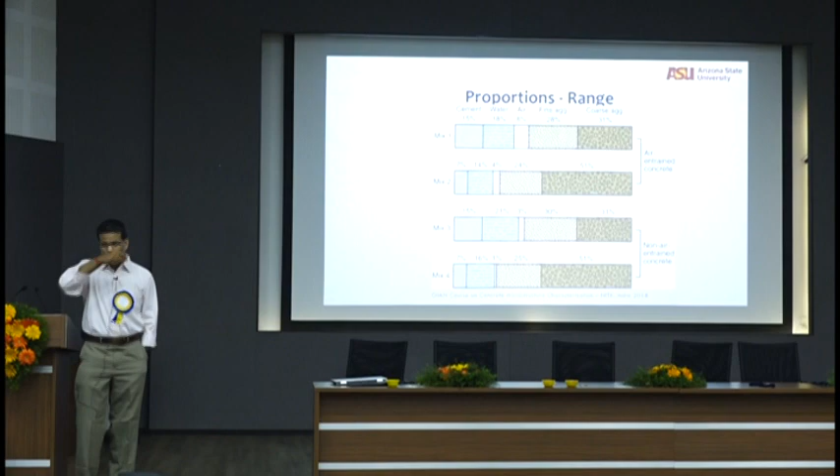Just some rough numbers of air entrained. I mean, this is the typical US. In the US, most concrete is air entrained. You will have some air in all the concrete because we have freezing and thawing in pretty much every part of the US, except for the Southwest. But still, air is there in every concrete because we need protection from freezing and thawing. You will have freezing and thawing issues if you go up in the Ladakh, Leh, Kashmir, Himachal Pradesh areas. You have the same thing there also.

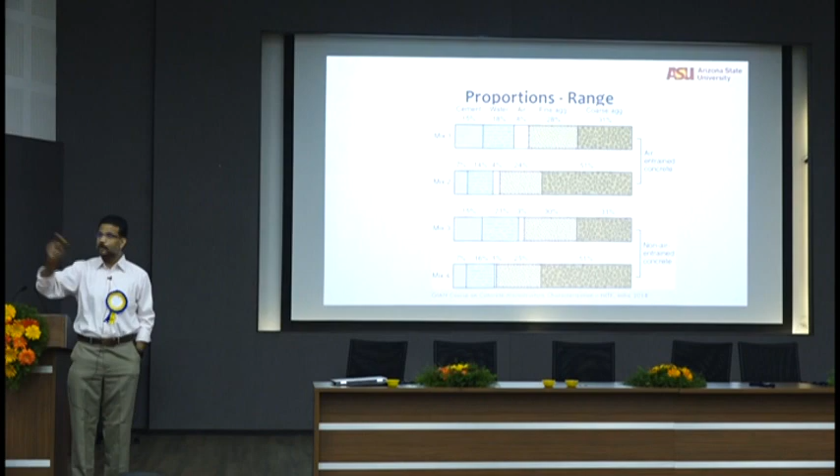So if you look at air entrained concrete or non-air entrained, you see roughly what volume percent is cement, what volume percent is coarse and fine aggregates. Here also you will see a little bit of air because even if you don't want to put in air, you will have some air. You see all these honeycombs and stuff in the concretes that are made. And then 30 to 50% of coarse aggregates, 25 to 30% of fine aggregates, 16 to 21% of water, 7 to 15% of cement, roughly by volume.

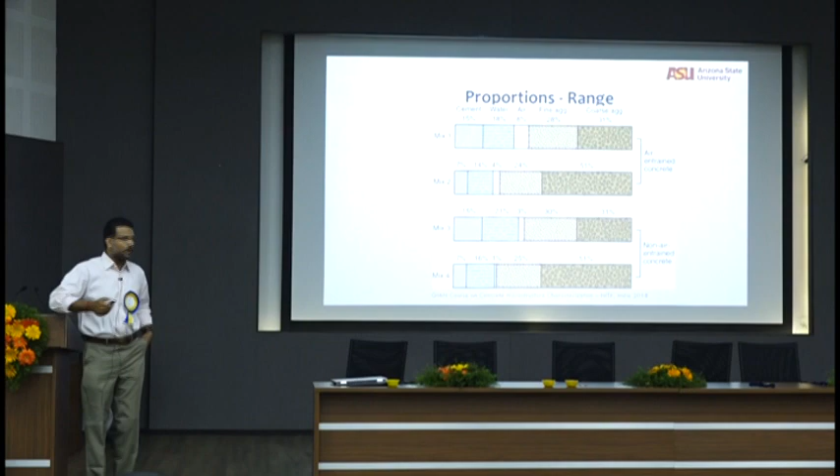Okay. Now, one of the important things is that if you do concrete mixture proportioning, you always do it by volume, right? Because nobody asks you for 10 kilograms of concrete. They'll ask you for 1 cubic meter of concrete. So if somebody asks you for 1 cubic meter of concrete, you have to design it for 1 cubic meter, not for the equivalent weight, because mass is not a good way to design anything.

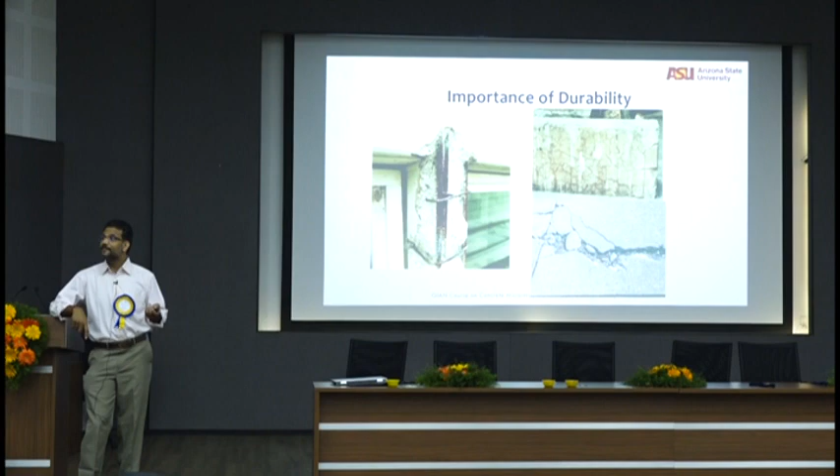Okay, so simple. Again, a food example is very easy to relate to. Normally, when a doctor says, if you have some disease and you have to control your food, they'll say 1 cup of rice, right? Volumes. But if you travel on airplanes now, they'll give you 100 grams of biscuit, 50 grams of cashews. Food was always in terms of volume. Now food is in terms of mass because they can charge you for mass easily. They can give you something of very high density and the volume would be very little. Okay, durability, we'll cover durability in one complete session on Friday, possibly, on what happens with damage and how microstructure relates to damage.

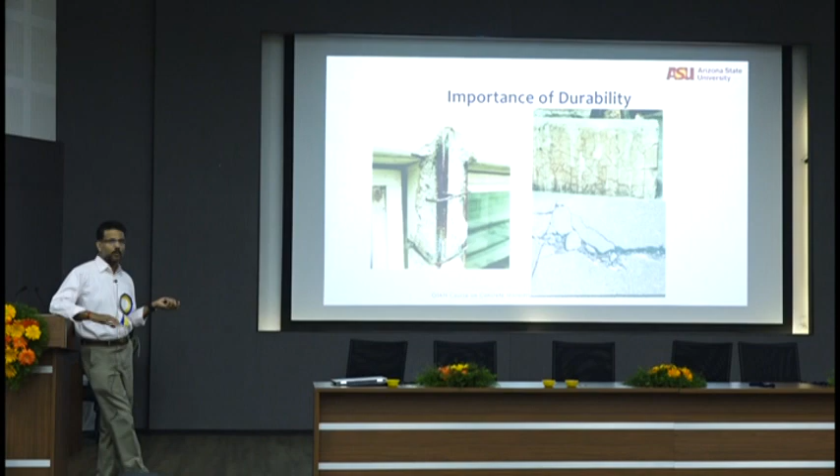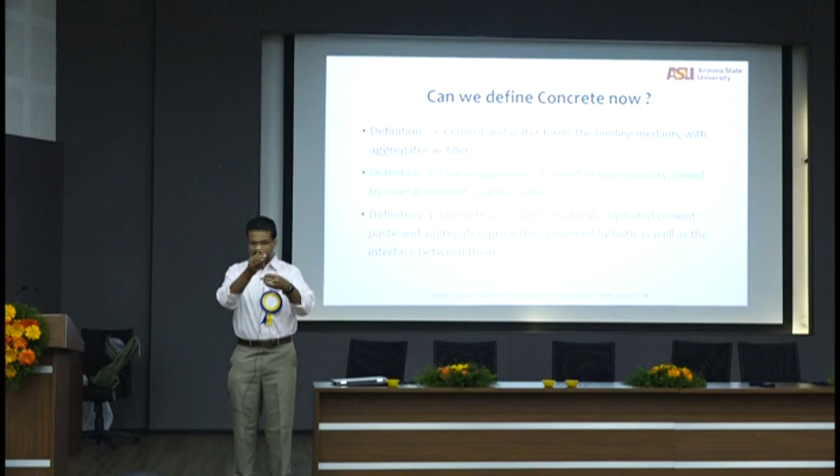Here is where I talk to you about the weak link theory, right? When you join something, what is a weak link? The interface between them. If you take sand and paste, and aggregate and paste, and take 1 cubic meter of concrete, how many interfaces? Billions and billions of interfaces, right? You have so many interfaces, you're not dealing with 1 or 2. So it is interface properties that control a lot of different things.

Now, how does concrete fail? Does concrete fail in compression? Is concrete weak in compression? No, it's weak in tension. Tension means what? Pulling. If you have an interface, what does pulling mean? Separating things. Very, very natural. Now, when we talk about mechanical properties, we'll deal with the idea that the idea of compressive strength is totally wrong. Okay? In real life, nothing should fail in compression.

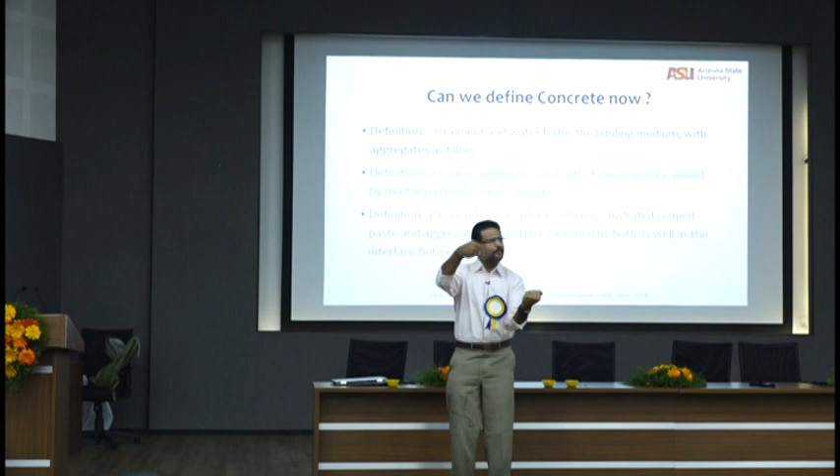Get the idea? If I push, a compression means two atoms coming close together. When I bring two different things close together, why should they fail? Should they fail? But why are we still failing? If I take a concrete cylinder and compress it, it's still failing. Why is it failing? Is it failing in compression?

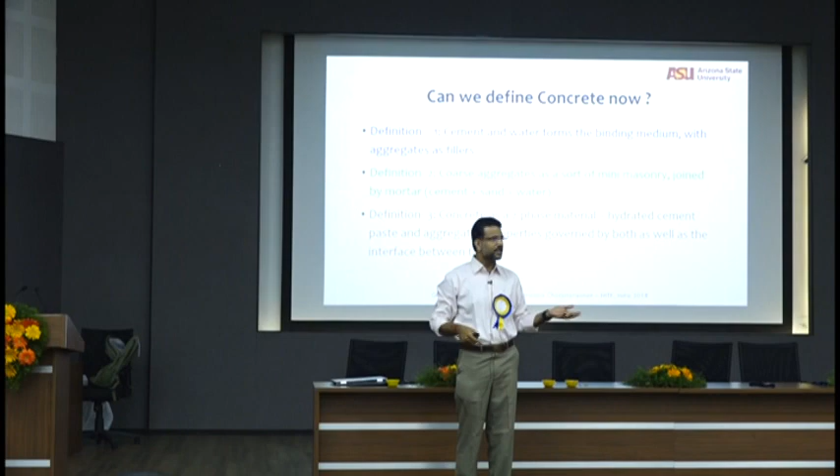Structural engineering question. Yeah, it's failing in tension. How is it failing in tension? Because of the wonderful thing called Poisson's ratio. When I have a longitudinal compression, I have a lateral expansion. Concrete expansion means what kind of stresses? Tensile stresses. It is that tensile stress that fails it, not the machine, the stress that the machine applies.

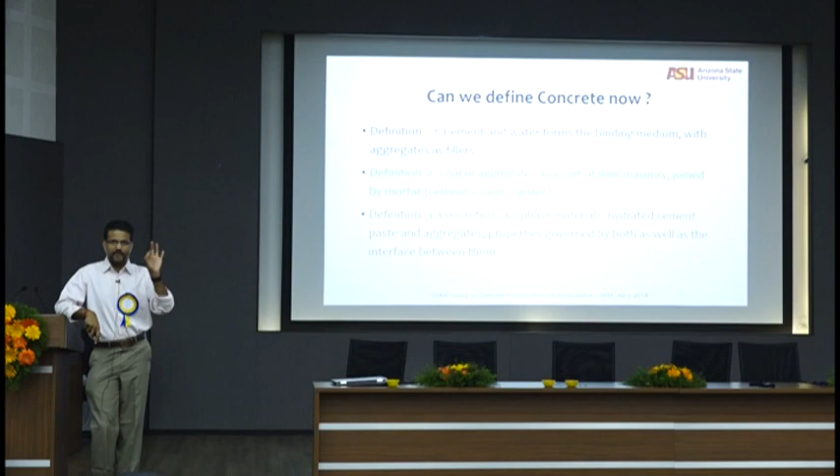But we don't want to change what is traditionally called compressive strength, so we still use a random number. Compressive strength of concrete is fundamentally, scientifically, a totally useless quantity. 40 megapascal concrete means nothing. 40 megapascal in compression means nothing. 100 megapascal in compression means nothing. It's just a convenience number because that one number masks my entire ignorance about concrete as a material.

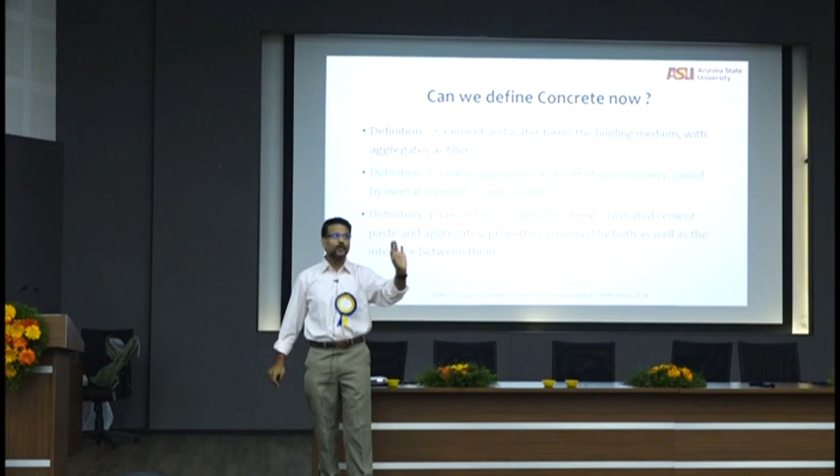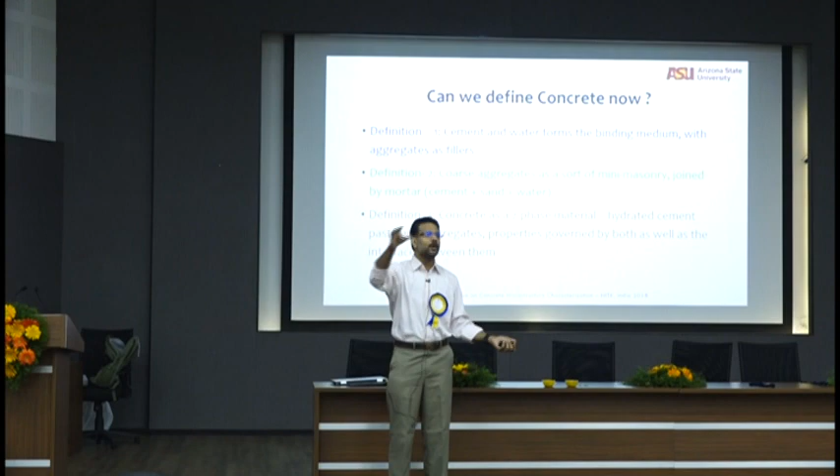I say 40 megapascal, I think I've conquered the world. I completely mask my ignorance about everything that has gone wrong in that concrete by showing a 40 megapascal strength. I can have a big gaping hole in that concrete and still get 40 megapascal strength, right? I can have all the dirt and all the unnecessary minerals in it, but if I dump 800 kilograms per cubic meter of cement, it will give me strength. But is that the concrete that you want?

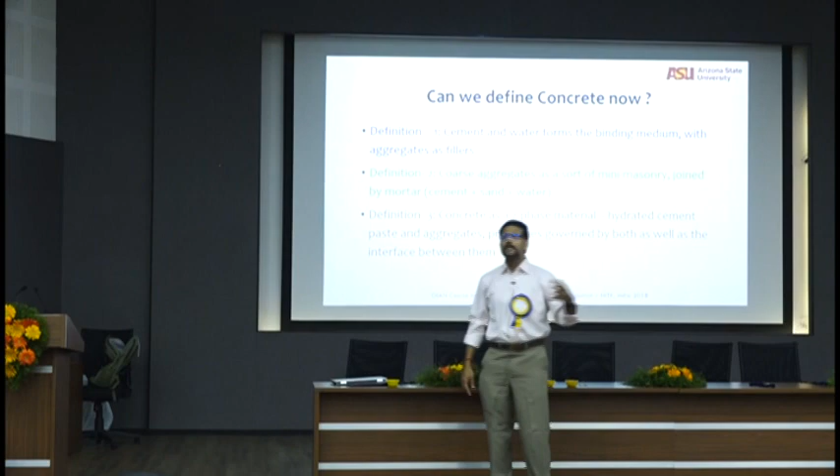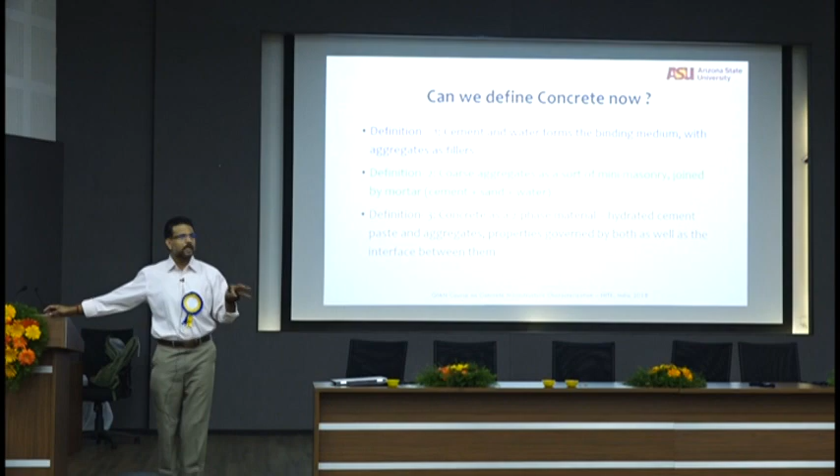The question: strength as an acceptance criterion, you and I can do nothing about it. This is entrenched deeply in the public psyche. We cannot do anything. He was talking about 43, 53 grade cements. In the US, there's absolutely no grade of cement. There's no 43, no 53, no 33. There's just Type 1 ordinary Portland cement. Buy it, you will get some strength. That's it, period. Maybe 43, maybe 50. Nobody's worried about the strength of the cement.

Because, very simple idea: if I know how to design concrete, I can design concrete from any strength cement. If I know how to proportion it, and we'll talk about that as we go through, if I know how to pack my particles really well... How many people can fit in this room? Equal to the number of chairs. But if you look at some private buses that are flying through, do they just fill in people with the number of seats? They pack in as many people as they can.

So I used to work in Bangalore a long time ago. The conductor will say, go in, and there will absolutely be no space inside, but he'll still say, keep going in, keep going in. That's particle packing. You see these buses? That's packing. If you really pack more and more particles, you will remove the porosity. When you remove the porosity, things get stronger, right? So it's about packing, not about the strength of cement.

Cement is the glue that holds all these things together. If you put in 800 kilograms per cubic meter of cement, you will have a thick layer of cement around an aggregate. And if you take a piece of concrete and see a really thick layer of cement paste around the aggregate, you will know what happens, right? So it's not the strength of cement that matters, but how much paste is formed and what forms in the paste.

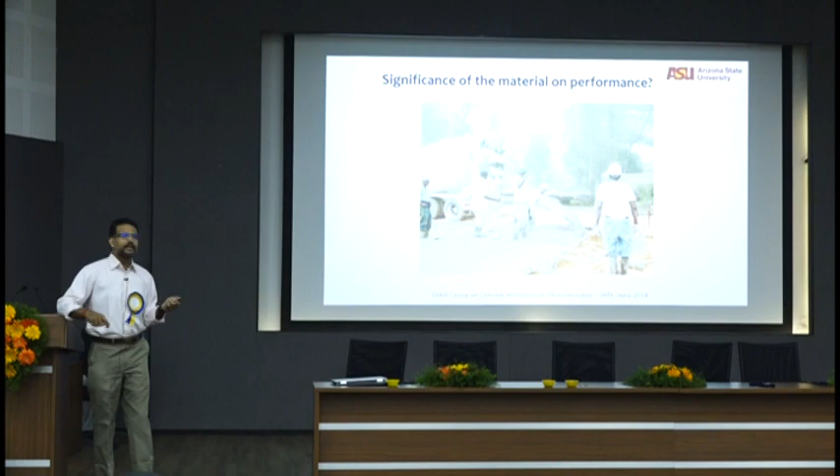Now, if you say all of these, when the concrete goes bad, what is that guy going to come and tell you? You asked for this. I gave you exactly what you asked for. Right? So we have been living in the prescriptive world for too long. It's changing now. In the US, a lot of it has changed. It's all called performance-based specifications. I'll tell the contractor, I want 40 megapascal strength. I don't care how you get it. Get that to me.

If it's a pavement, I would say I want 40 megapascal strength. I want the pavement to have an initial surface roughness of so much. I want the pavement to have a certain rapid chloride permeability value so that it doesn't get deteriorated fast. You will give 3 or 4 more performance indicators, not prescriptive indicators. So what that gives is, if it's a cement manufacturer or a ready-mix manufacturer, if he's really smart, and if he says, okay, I can give you the performance with 40% of fly ash instead of 35, won't he do it then? Right? If he does that, is that not better for all of us? That is the training that we should have. The training of giving people the knowledge and the freedom to design things, rather than what did you learn in your college? What did Professor Shetty's book tell you?

Please copy that and give that back. We don't need engineers for that. We have enough people who can just copy things from one place to the other, right? You go and sit in this document writer's office, in an advocate's office, they copy from one paper to the other, right? We have enough of those copies. We don't need them. Engineers need to be thinking and getting new things out into the market.

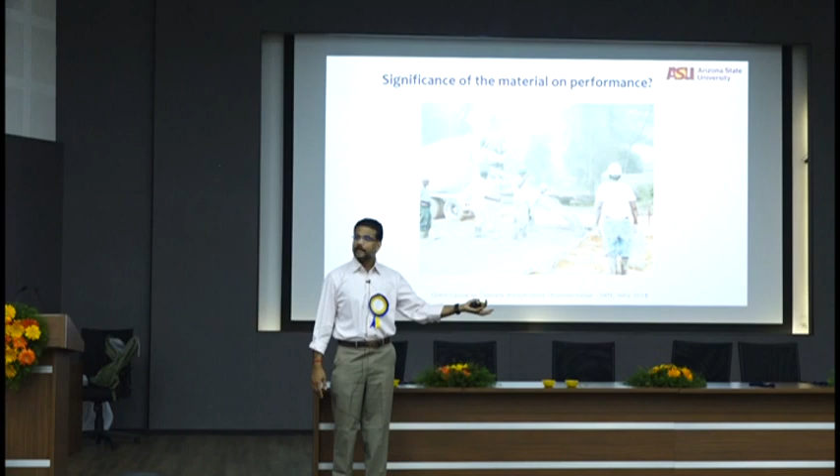So prescriptive specifications have to go to a certain extent. Now, why are prescriptive specifications not leaving us? Because the engineer or the owner doesn't have confidence in the contractor or the producer. So if producers are all established big companies, big ready-mix companies who know what they're doing, with good engineers on the board, and they come and tell a state PWD, okay, you want concrete, what do you want? You want this, right? I'll give you, don't worry, and I'll take the risk of something happening in it. When they do that, and when that establishes, things will change.

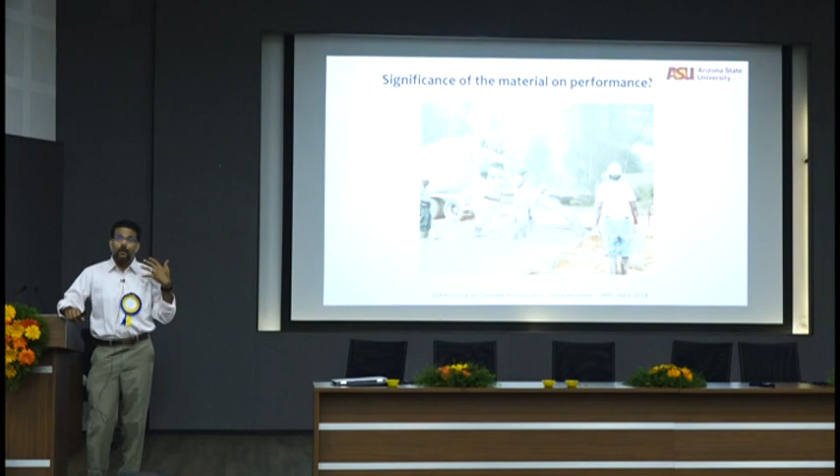But I think we should collectively argue for, and this is one of the things that is in the document that I sent to the Ministry of Surface Transport, which is in some dustbin now, moving more towards performance-based specifications. So if I say what I want effectively from my concrete is performance, however you do it, I want performance. So the question is, what are the effects of material properties on performance? That's something that we will look at in the next 3 or 4 days.

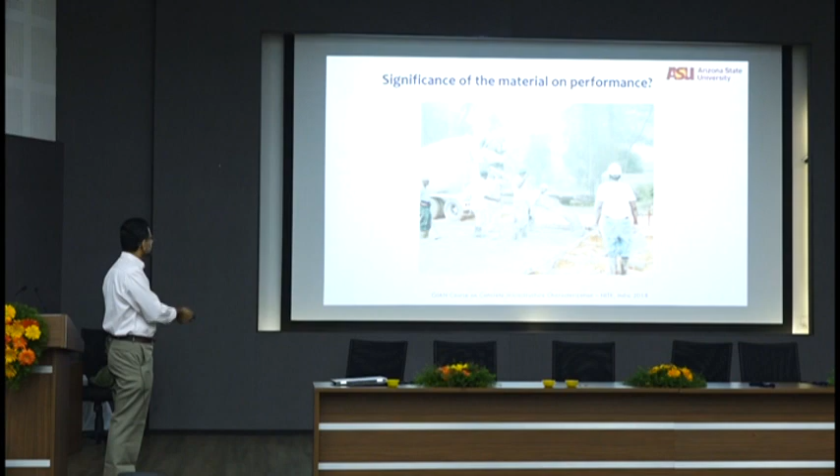What happened? Oops, okay. Battery is running low.

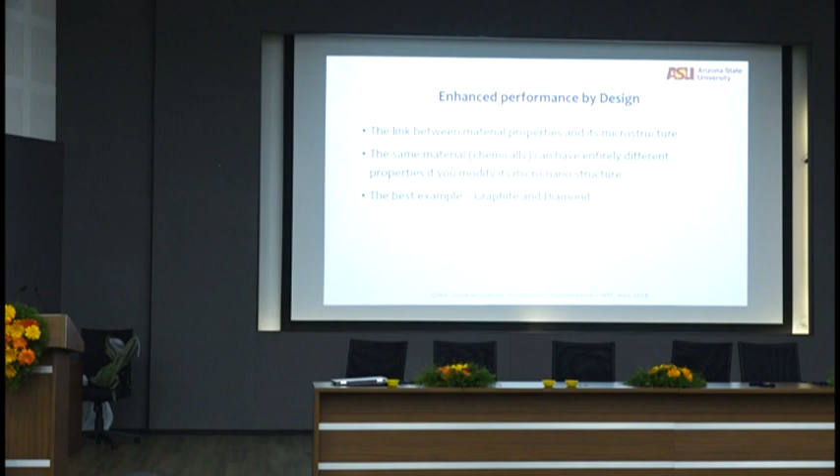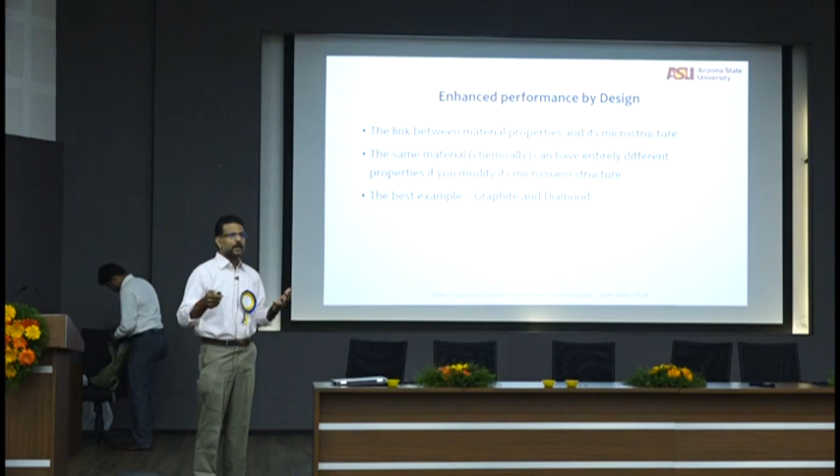Okay, so, enhanced performance by design. We have to look at the link between material properties and microstructure. That's what I said we'll do, hydration. Now, we also have to know that concrete that looks alike, or I put the same exact thing in this concrete and that concrete, why is it different, right? And I always use the example of graphite and diamond. What is in graphite and diamond? Carbon. Would you pay the same price for graphite as you would pay for diamond?

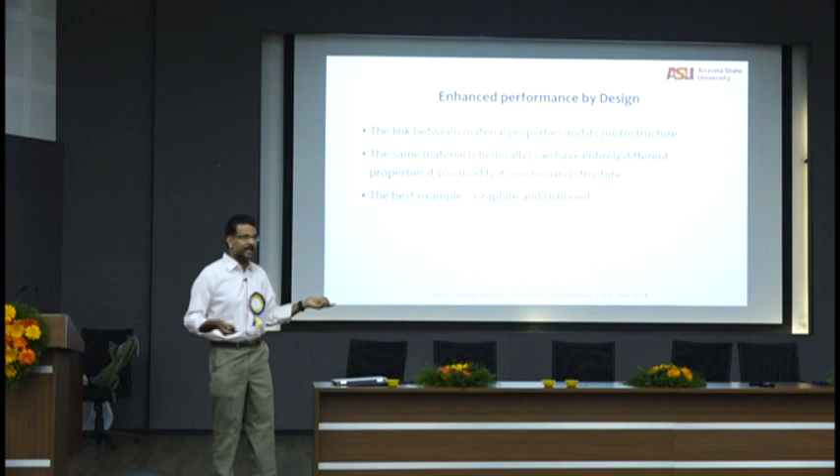Oh, sorry, diamond as you would pay for graphite? No. Why? You get something in diamond that you don't get in graphite, right? You can gift diamond to somebody, try gifting graphite to somebody, right? Won't be a good experience. So same thing. Effectively, can I go and say, okay, don't worry, this is carbon, that is carbon, take it? Does it work? Well, it might work. If you have a really enlightened somebody who is receiving it, it might work. But generally it doesn't, because even though they are chemically the same, they are physically very different.

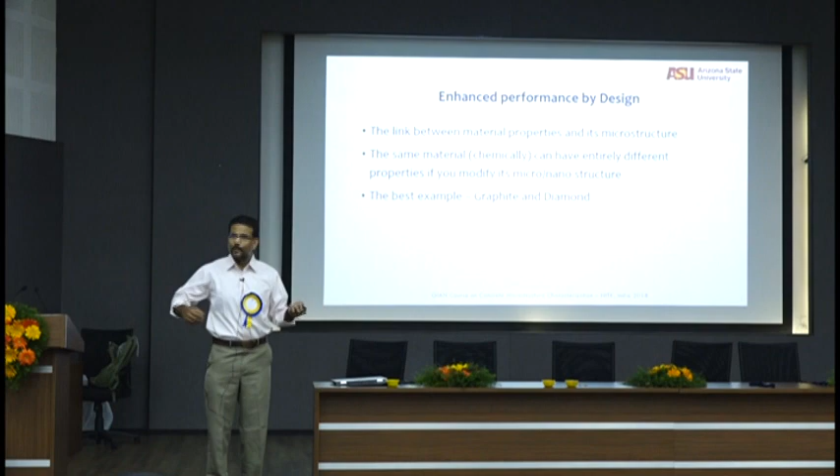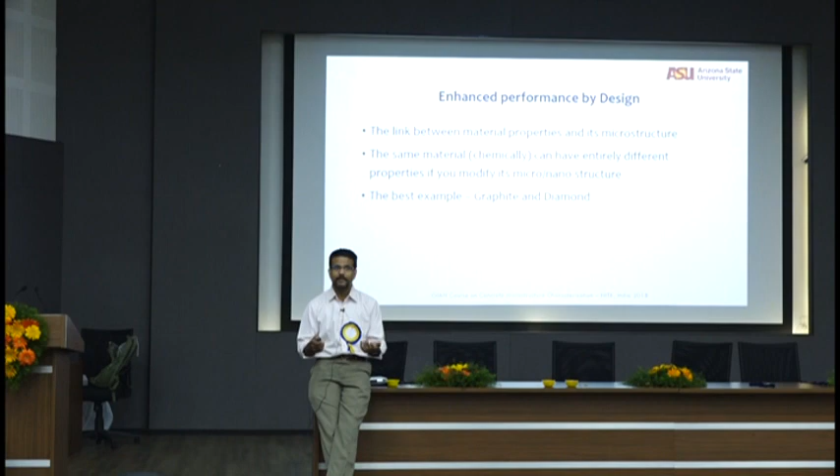Properties are very different. So when somebody comes and says, so here's a simple example. Again, I'm giving you tools in your real life to argue with someone. Oh, how is this different? I put the same thing here and same thing here. Why are you telling me that it's different? You can ask the same thing. Graphite and diamond are the same thing, but they don't do the same job, right? So even if it's the same chemically, physical properties might be different.

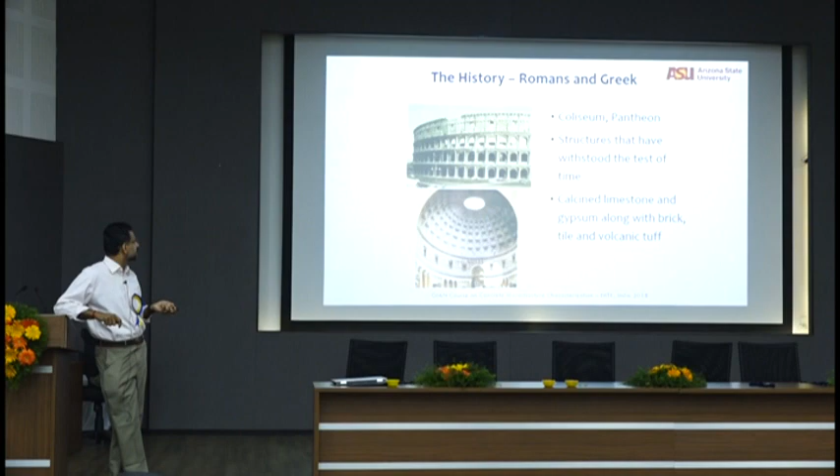Okay, cement. We'll start with cement, which is the core, strength-giving, structure-giving component of concrete. All of you know what that is, so I'm not going to go too much into that. History of cements, Colosseum. I'll share the slides with you if you want, so that you can look at some history. John Smeaton

apparently designed or made the first recorded concrete in history in 1756, where he mixed powdered bricks and added pebbles as aggregates. So I got a PhD thesis from one of the universities in India to evaluate, which was exactly that. They were using powdered bricks and then some pebbles, and they made what was called some sustainable concrete. So I was thinking, what's the difference between that guy and John Smeaton, who did it in 1756, where somebody else did it in 2012, right? Very similar. So again, we do a lot of recycling, reinventing the wheel, which is okay.

Sometimes you may have to do it, but it's always important, especially for students and research scholars, to really, really know what has been done in the area, okay? You have to know really, really well how to do a literature review.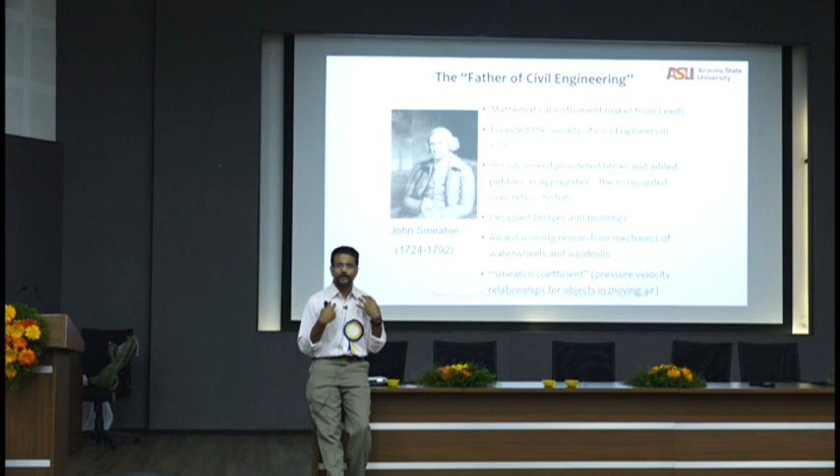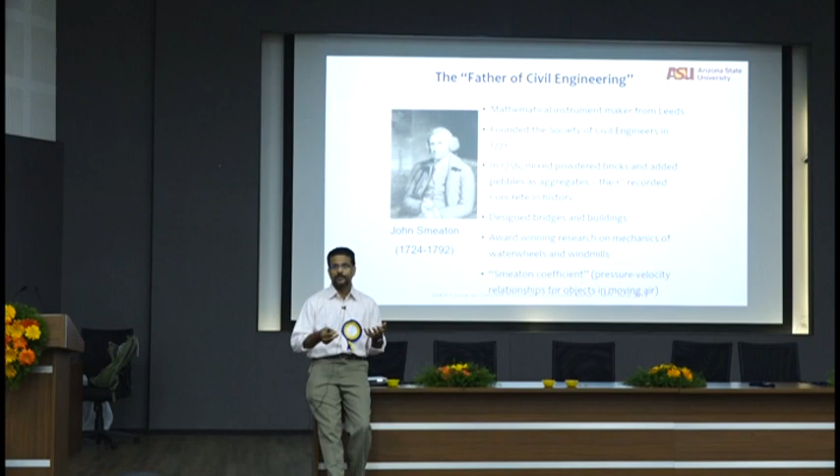During my days as a graduate student at IIT Madras, I had to go to the library, a 20 paise per page photocopy, take all the old journals, sit, dirt, you sneeze, you get a cold if you sit in the library for 3 or 4 days because all the book stacks were so heavy and so dirty. You make copies of it, you go to your hostel room, you read it, you come back, you still don't get all the available literature.

What about now? There was no Google in our days, right? There's absolutely nothing that you can't find. Now it's information overload, right? So you should be able to parse the right information and be able to collect all the relevant information. So your literature review, you should not be very broad and do everything in concrete. Nobody can do. But the topic that you're working on, you should have a thorough knowledge on that.

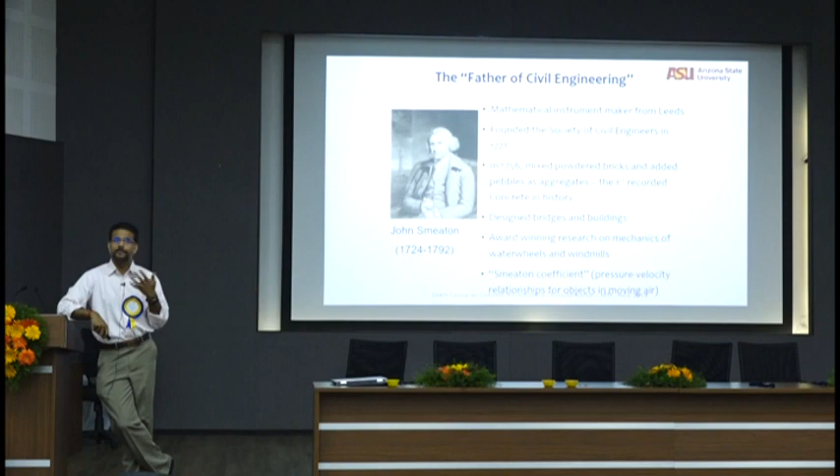And the way I check with my students is that they should know the names of the key people who have worked in that area. If I say a name, if I say, who is that, I don't recognize, I know that he hasn't read the papers well. So you have certain key people who would have done certain things, and you should know them, because like Newton said, we stand on the shoulders of giants who walk before us, right? It's important to recognize, and it's important to know. So history, while not very relevant in engineering generally, is important to know.

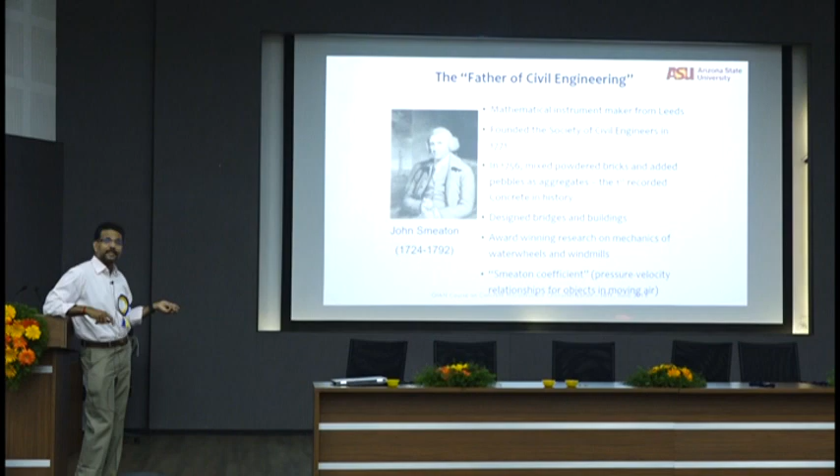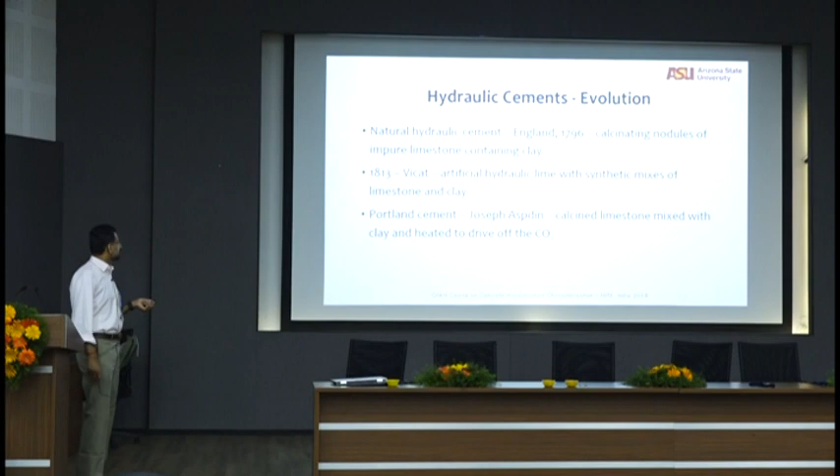He did mechanics on water wheels and windmills. Pressure velocity relationships to objects in moving air is called Smeaton coefficient. So he did a lot of different things. He was not a civil engineer at all. Hydraulic cements in 1796, calcining nodules of impure limestone containing clay in England. 1813, Vicat. All of you remember that name? Vicat apparatus. Artificial hydraulic lime with synthetic mix of limestone and clay, he slaked them.

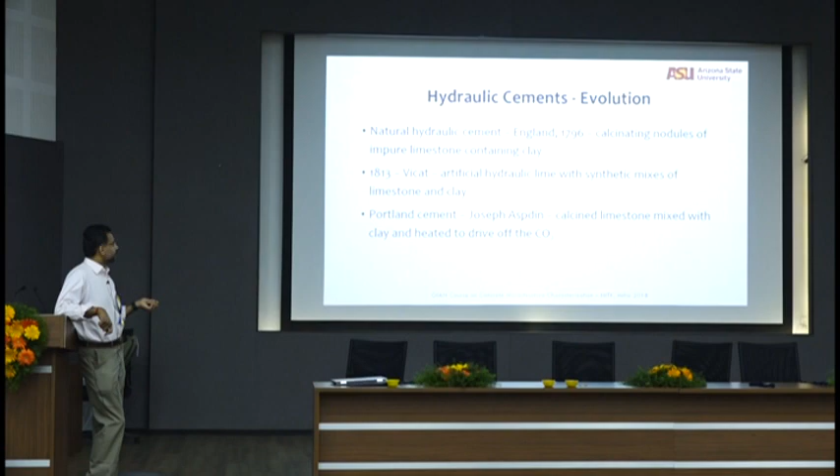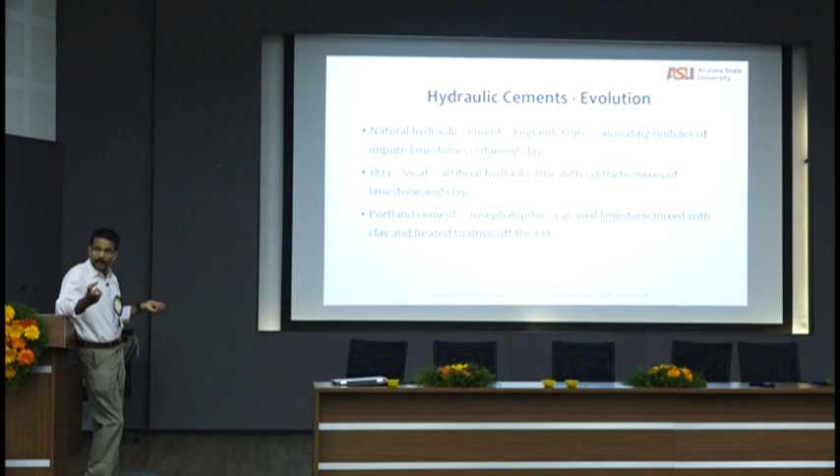Portland cement is attributed to Joseph Aspdin. He was not trying to make cement per se. He was trying to mix limestone and clay to see if he can get CO2 out of it, because limestone has CO2. And then, lo and behold, it became a hard product. So he figured out that might be useful for something else. Portland cement is named after the Isle of Portland in English Channel. Natural limestone for cement manufacture was quarried there first.

First use, like I said, John Smeaton. First patent, Joseph Aspdin in 1824 in the UK. In the US, first patent, David Saylor in 1871. So it's not a new material by any means. 1796 through 1871, all the research and discovery in Portland cement has been done. Okay, we are now just sitting and scratching the surfaces here and there.

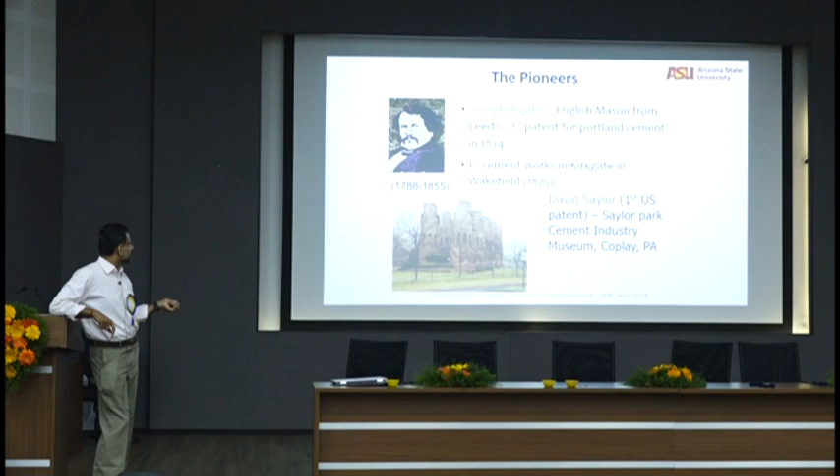Okay, so ASTM C150, which is what we all use for standard for cement. I know, what is IS standard for cement? IS what? Now IS 269 for OPC. Okay. For PPC it is 1489. Okay. For PSC is 455. Okay. So you have all these different standards. In our world, there's only one, ASTM C150. We are done with it. Just one standard for all the cements. So fly ash and all, we have different standards.

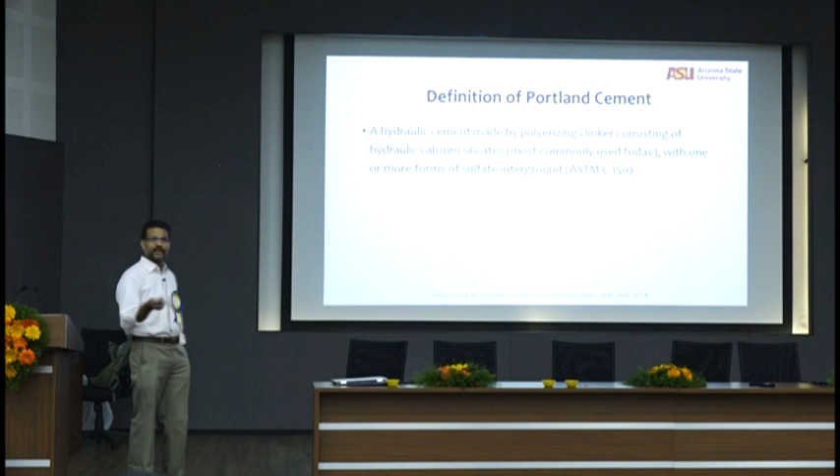Okay. So hydraulic cement made by pulverizing a clinker consisting of hydraulic calcium silicates with one or more forms of sulfate interground. Very simple, right? Hydraulic calcium silicate with some sulfate. What do you need sulfates for? Flash setting, gypsum, addition of gypsum. That's all you need. So anybody who is in the cement business will know that. It's also very important to know.

How many kilograms in a bag of cement? 50 here? 50. And how much does it cost? 400 rupees. So it's about 8 rupees a kilogram. What other material will you get a kilogram for 8 rupees in this day and age?

Salt. I bought 100 grams of Tata salt for my mother, 18 rupees. 100 grams of Tata salt. Gandhiji said this should be free for everybody, right? But apparently it's not. What other material can you get for 8 rupees a kilogram?

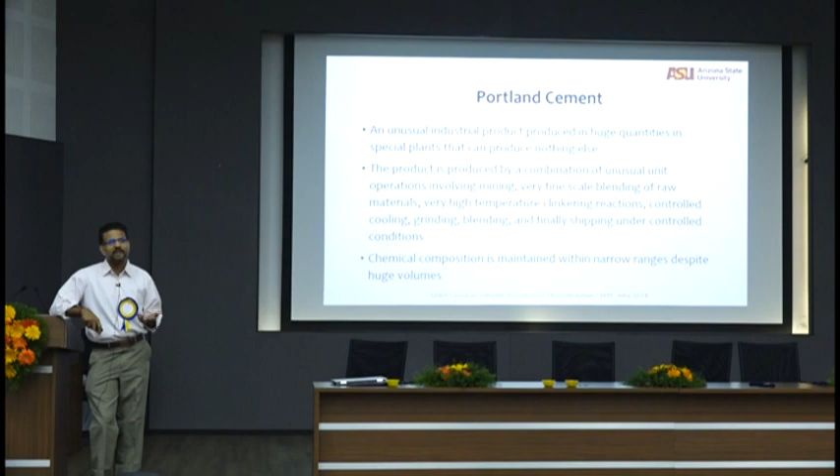Nothing, almost nothing. How much does a cement plant cost to build? I'm just playing the devil's advocate for the cement manufacturer. I'm giving them the latitude to say that yes, we can increase the price further. How much does it cost to build a new plant? What's the newest plant in India that was built? Was it Reddypalayam? After Reddypalayam, did they build something else?

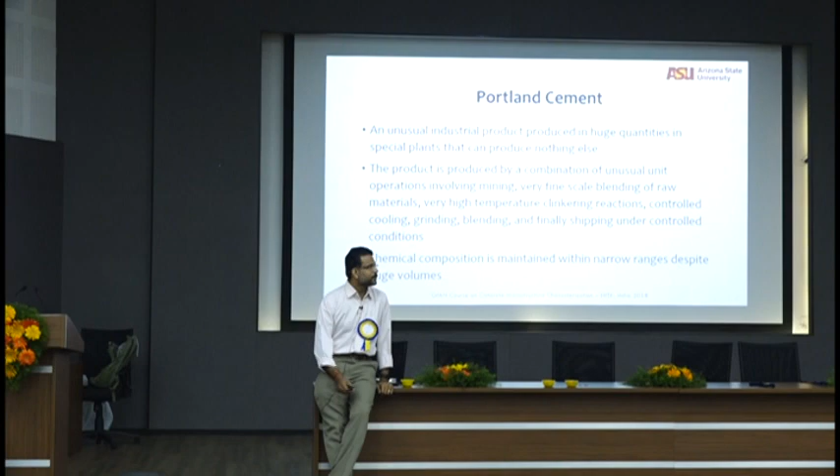Recently it is in North Karnataka, a plant built with 4,500 crores. Okay. Well, 4,500 crores. And how much does it produce? 3 million. Reddypalayam was 1 million. 2 million. So 3 million tons, 4,500 crores. So you're spending 4,500 crores as an investment to sell something for 8 rupees a kilogram. Right? You should say it's a stupid business model.

Who is trying this? But how do they make money? They know that you have no other option to build anything. Volumes. It's the volumes that speak of it, right? You have to use cement to build all the infrastructure that you see, billions and billions of tons required to create infrastructure. So there's no way that you're going to do anything else.

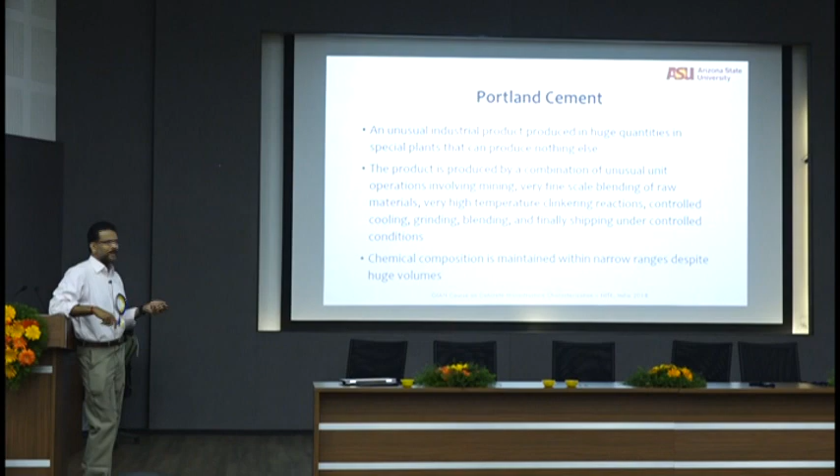Now, I'll show you a little more complex operational stage in a cement plant, and most of you might know it. So you have mining, blending, clinkering, cooling, grinding again, blending, shipping, all these things being part of just one single manufacturing operation. Typically, you might mine and leave it, right? Companies like Vedanta, they're creating big problems now. You heard that in Tuticorin. They just mine. They don't do anything else. They just mine and sell.

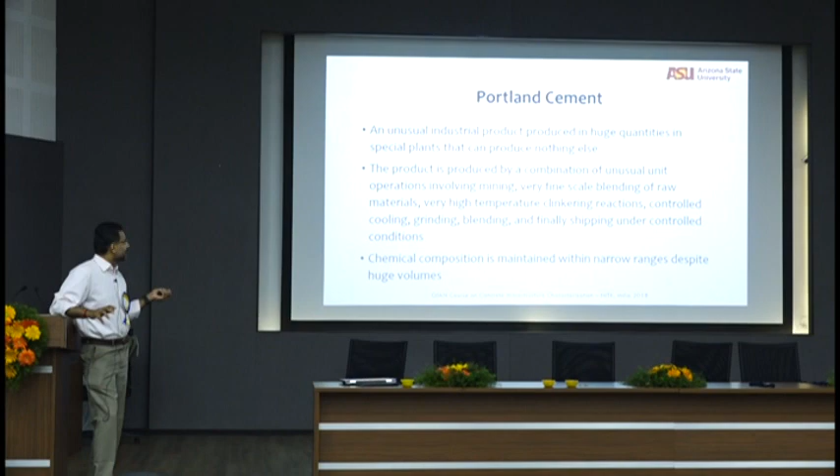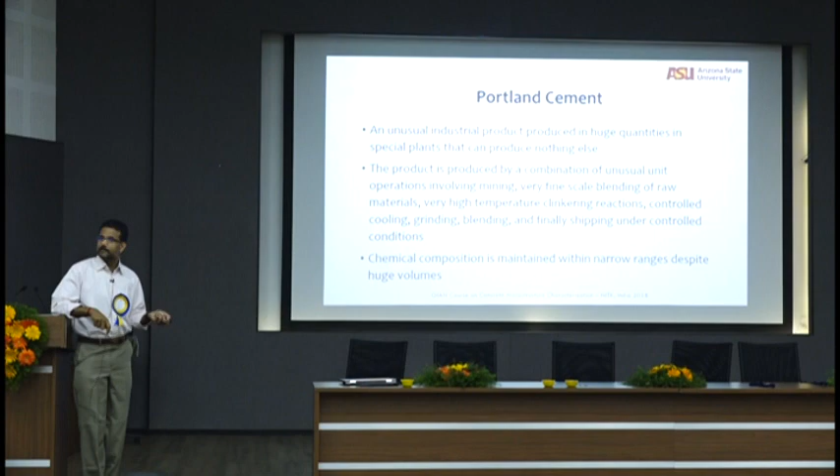Blending, you have companies that blend. Clinkering, high temperature clinkering, or if you want an example, not really high temperature, but pelletization in the drug industry. They get these compounds and pellet them and give you the tablets that you eat, right? A controlled cooling, grinding, blending, shipping, all of these in one operation.

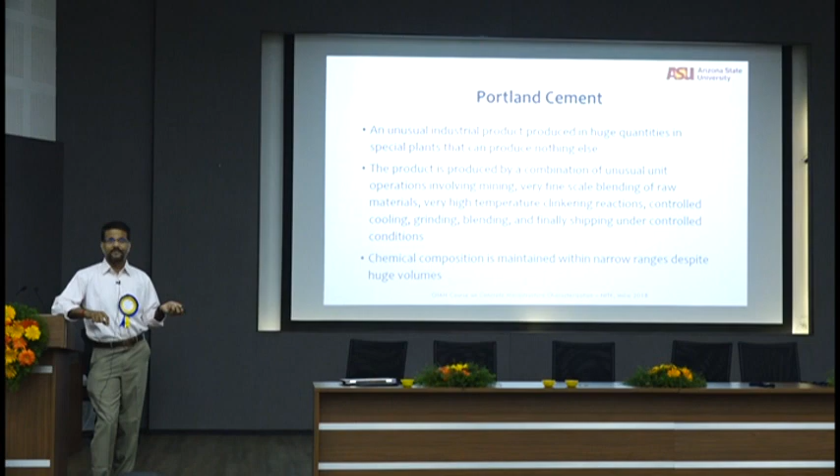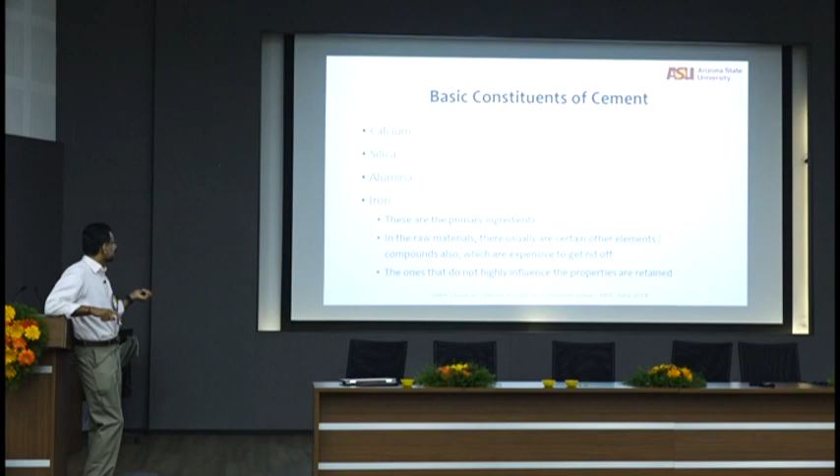And chemical compositions, when you do this, have to be maintained in very narrow ranges, right? Calcium oxide content a little high, you have free lime. Calcium oxide content a little low, not enough C3S forming in the reactions. It's a very, very fine balance of what you need. Basic constituents: calcium, silica, alumina, and iron, and then you have other minor elements. Very basic idea. Where do you get calcium from? Limestone, marble, shells, shale, but mostly from limestone.

Silica from clay, fly ash, limestone. Alumina from bauxite, shale, slag. Iron from some iron ores and clay. Sulfates from gypsum or anhydrite. So that's the classic way in which you get all your components.

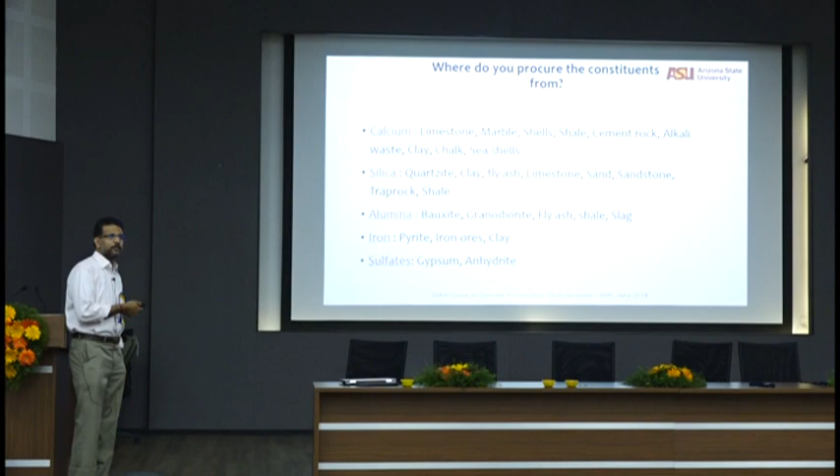Now, typical numbers, I think these are all over the world. Calcium oxide 60 to 67%, silicon dioxide 17 to 25%, aluminum oxide 3 to 8%, iron oxide 0.5 to 6%, magnesium oxide 0.1 to 4%, with issues with soundness if you have more. Alkali, sodium and potassium oxides 0.2 to 1.3%. Typically your IS standards or ASTM standards will ask you to keep it lower than 0.6. Now in India? Yeah, 0.65. In the US it's 0.6. So they'll ask you to keep it lower than 0.6. Sulfates 1 to 3%. So that adds up, and that's all what you have in this very complicated material.

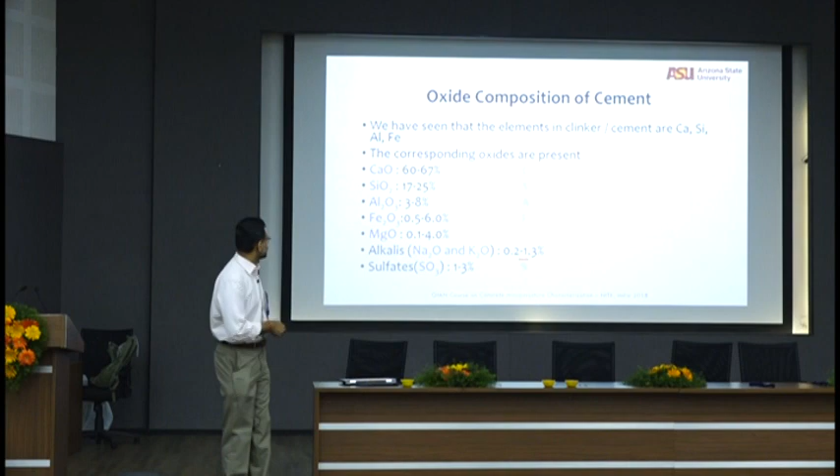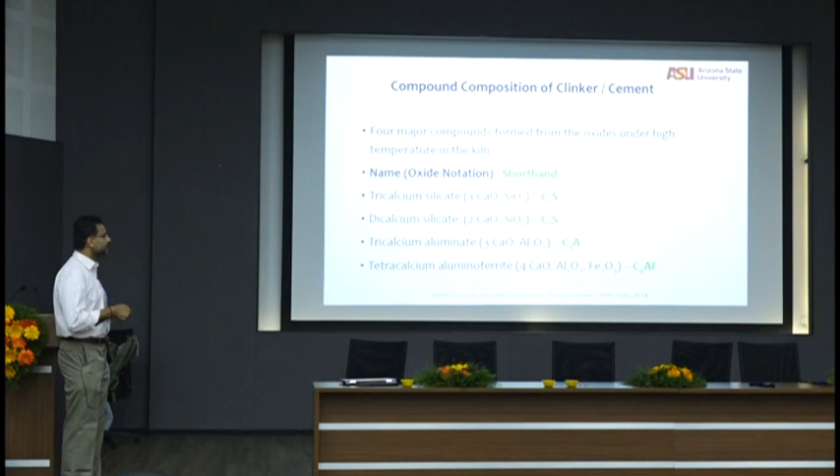Now you have some complications. I'm sure all of you are familiar with these terms, right? C3S, C2S, C3A, and C4AF. So I'm not going to go into it. But again, make sure that you understand what this means so that when I say C3S, you don't get confused. All of you good with this so far? Am I going too fast?

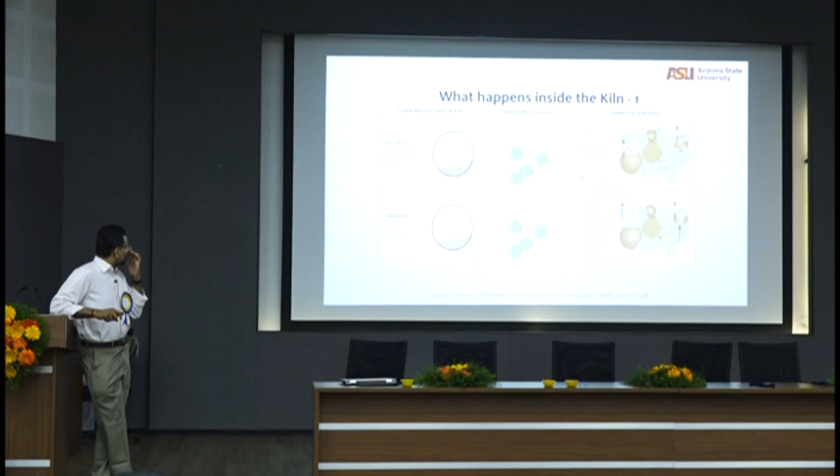Okay. Cement kiln. All of you must have seen cement kilns. If not, I would strongly encourage you to go and visit a cement plant. There are plenty of them around. What happens inside the kiln? This is something that I would just want to briefly touch upon because this influences the microstructure later on.

So you have all the different materials that you throw into the kiln, and then you start heating it up, right? You want to get clinker out, but before that happens, until about 700 degrees Celsius, you have free-flowing powder. Your water is lost because of the high temperature, and then you have dehydrated clay for alumina. Clay starts recrystallizing, you have clay particles, you have limestone particles, water is being lost. At 700 to 900, calcination happens, right? At about 800 degrees Celsius is when calcium carbonate becomes calcium oxide and carbon dioxide.